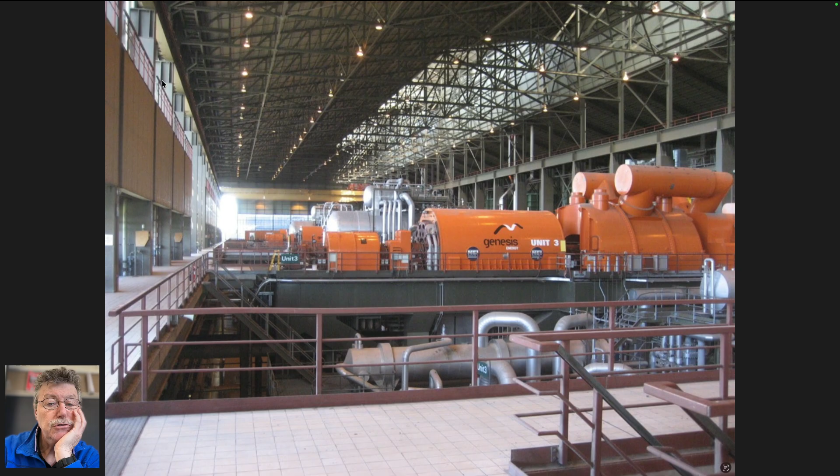So, yeah. Huntly Power Station control room - this is a long time ago. It's a thermal, coal power station. These are coal boilers back here and turbines, and then they added a gas turbine running on natural gas.

Last time we were there in '23, I think they were almost shut down because they had a drought and didn't have any water to run through the turbines.

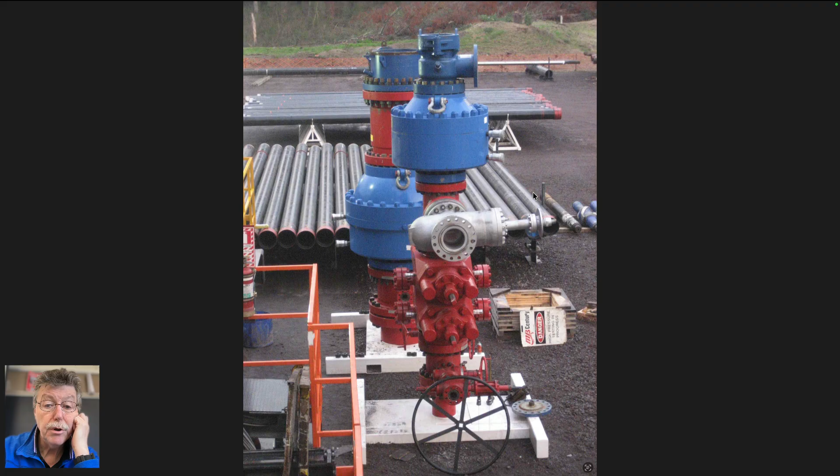Cabooses for accommodation, wind farm, Arapuni Dam, and geothermal plants - Rotokawa, I think. Geothermal generation control room, geothermal drilling rig, blowout preventers. Is it cold up there?

No, it's warmer than State College at that time of year. These were actually taken in May, but in March it would always be warmer - about 60. Isn't New Zealand in the southern hemisphere? Wouldn't that be their fall? Yeah, their fall - it'd be their winter right now, going into fall.

But when we went with the students, it's March, so it's almost 12-hour days, almost the equinox, which must be the 21st of March, right? Yeah, not terrible, not terrible.

Don't fall asleep. Chirpy, less chirpy.

Christchurch after the earthquake - this is 2013. I think the earthquake was 2011. Took a long time. I think this is a waterfall where everyone wanted to go.

What's the strange movie with short people with strange feet? Hobbits? Hobbits, yeah - you went to the Lord of the Rings filming location. This was apparently... we were there for another reason. We went past it. Yeah.

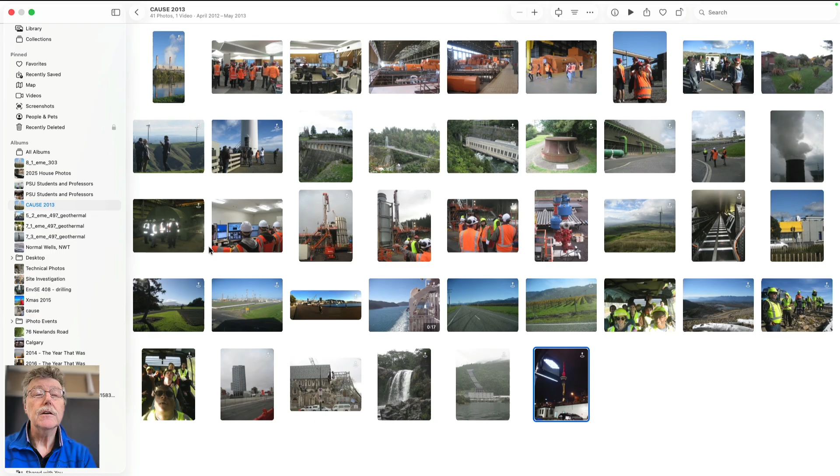Emily, are you alive? You're not paying attention, I know that, but are you alive? I am alive, after your big activity over the weekend. Well done. Thank you. Are the lights back on in DR? Oh, you know about that? I know everything. Some places - they had a big grid failure, 80% down? Yeah, good. Good to hear. Oh, you got to keep up with stuff. Yeah, you are. All right.

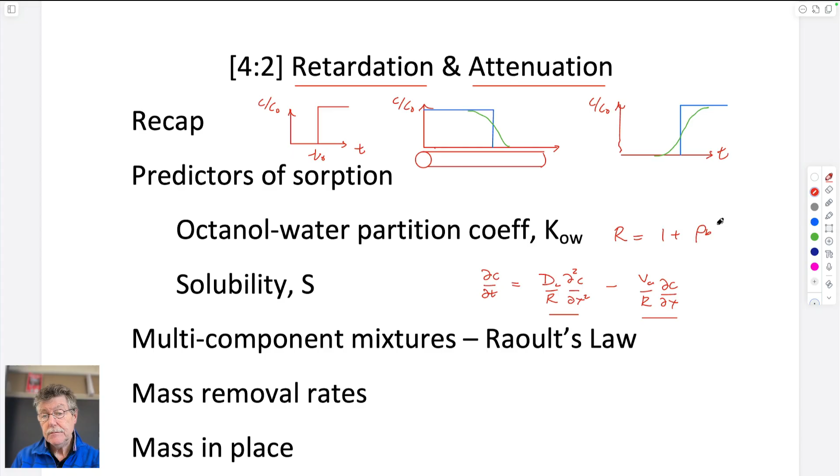Can't remember whether they call it uppercase K or lowercase. And either porosity or volumetric moisture content. If it's fully saturated, it's porosity, which would go into here.

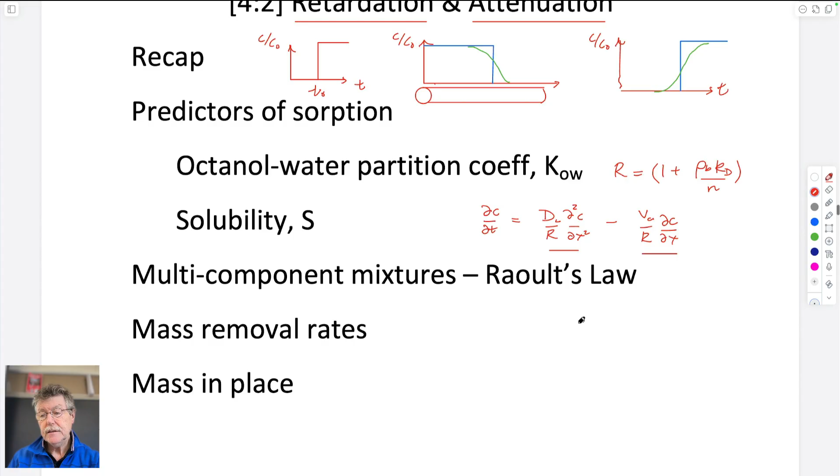And we could define the behavior in terms of this length traveled being equal to velocity times time over retardation. If retardation is equal to 1, then it's just as we had before. And T is equal to length times retardation divided by velocity, advective velocity. This is in the x direction.

And so if retardation is equal to 1, which it is when there's no sorption onto the static grains, then these equations reduce to the ones we had before.

I guess we also made the point that we can define these two important parameters: Peclet number, which is velocity times length over dispersion, and Courant number, which we call pore volume, which was, I can't remember, velocity times time divided by length. Velocity is equal to length over time, times time.

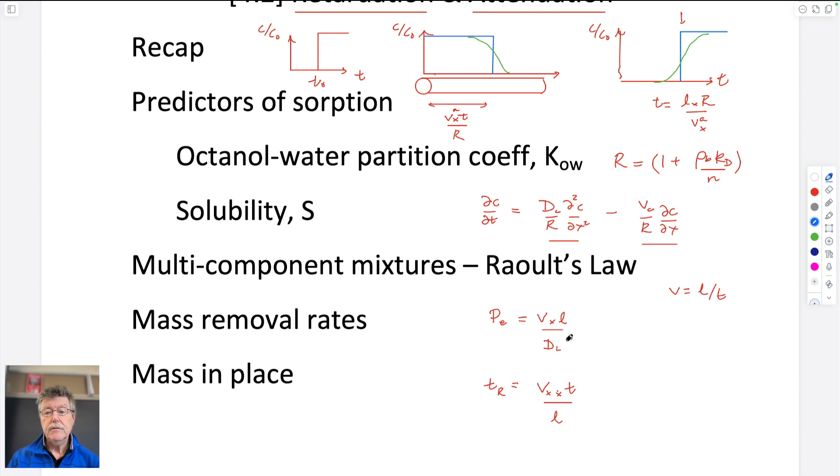And so this is equal to 1. If it's 1 pore volume, then it should arrive, and that gives us this point here. But I suppose we also made the point that we could also divide this velocity. So this velocity means that it would be physically delayed, and so the retarded breakthrough would be here, because r would be greater than 1.

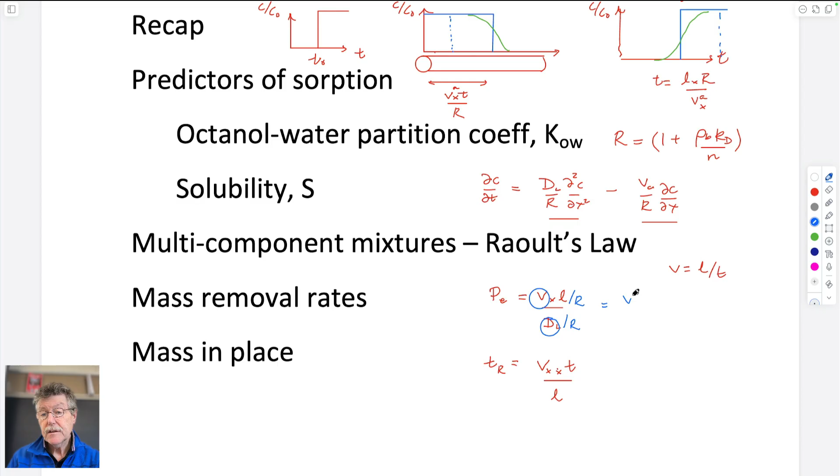And if that was the case, it would also arrive later. And so in terms of these numbers, we could take the velocity, which is operated on by this retardation factor, and the dispersion, which is also operated on by it, and we divide this by retardation, and we divide this by retardation for this, which doesn't change it. Velocity times length over dispersion. But in this case it does, because it's only this top value which is divided through. And so this would be advective velocity times time over length and retardation. So Peclet number doesn't change.

Courant number or pore volumes does change. But with these values, we can use those relationships that we drew the figures for.

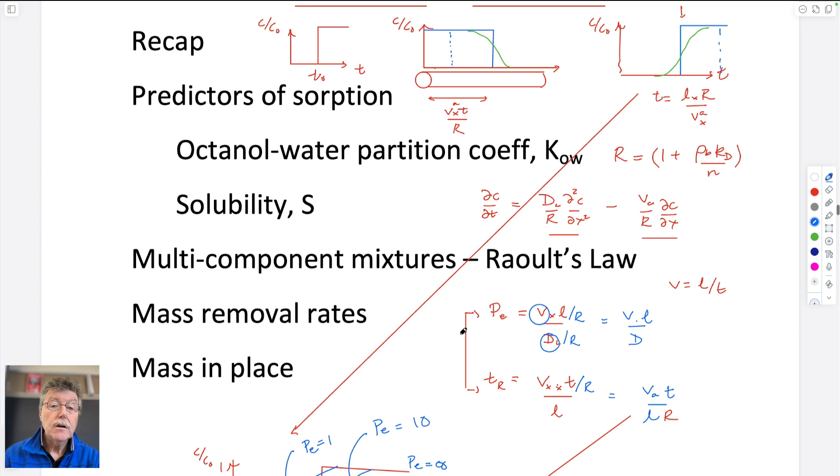So what we did last time was we looked at the controls on the distribution coefficient. We defined this distribution coefficient as equal to the concentration that's sorbed on the solid divided by the concentration in the liquid, in the water, by definition. And so we could always measure this. This was an isotherm, as we called it. And so long as we can get this, we can make some predictions in this behavior.

We didn't come up with any smart ways to do this, except we did use the natural gradient tracer test to realize that if we did that test and the plume went less far downwind as it did for a conservative solute, then we could use the ratios of the velocities as a retardation coefficient. That's physically what it means. It's the velocity of a conservative solute relative to the velocity of a non-conservative solute, and different non-conservative solutes, we chose two, might have different velocities, as we saw. But if we know how far they've traveled in a given time, we know the velocities are in the same ratio, and therefore the retardation coefficients are in the same ratio.

We could use the definition of retardation coefficient, switched around, to get KD. For the Borden site, for carbon tetrachloride and tetrachloroethylene, we got these values of KD. That's useful because we can use that in forward modeling to figure out what the plume would look like 10 years hence, or earlier, if we want to project behavior.

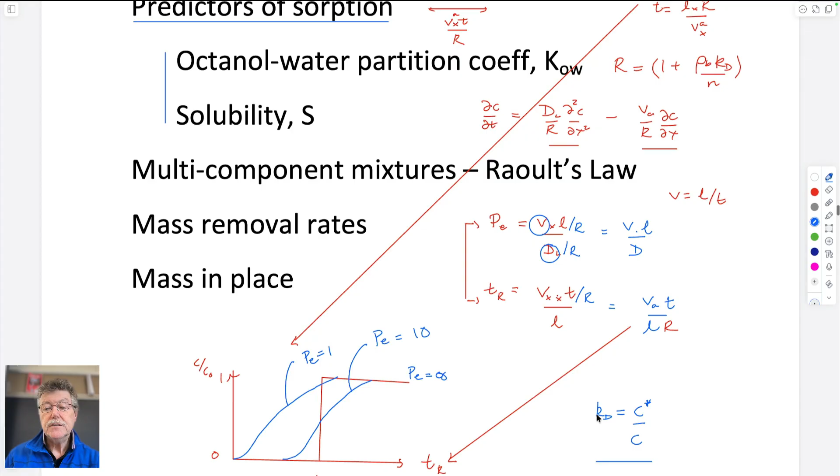What you can use as a predictor of sorption, and therefore of K sub D, are two methods: octanol-water partition coefficients, or solubility of that solvent in water, values you can pick up in a library text, to estimate this distribution coefficient without running the test in the laboratory or measuring retardation factor in the field.

So that's what we'll talk about today: getting KD from octanol-water partition coefficients and solubilities, and what we might want to do if you have multiple species trying to get into the water, as at Smithville, which you've been looking at.

We can also look at how much mass is in situ and how much mass the water can carry, because from Raoult's law, if we have multiple species competing to get into the water, it can't go in at the full concentration of its solubility—it'll be somewhat less. That's really what Raoult's law says.

We'll use that to calculate what the effective solubilities would be, which we'll call S sub E. And if we know the effective solubilities and run water through the system, we should be able to estimate how long it would take to clean up the aquifer with pump and treat.

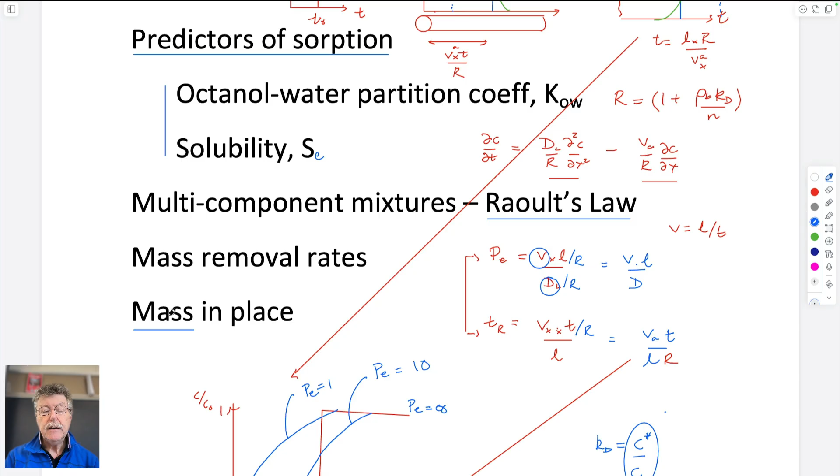We can also make refined estimates of how much solute might be in place, accounting for the amount present dissolved in water, which is just the volume of the aquifer multiplied by the porosity multiplied by the solubility. The volume of the aquifer times the porosity is the total void volume, and if that water is at a particular solubility, the product of those two gives you the mass in place.

But that doesn't give you the full mass in place, because some is sorbed onto the solid substrate, and we have to account for that. So the mass in place will be slightly larger, and it's related to the retardation coefficient. We'll see how to do it.

What's going on? That's not a problem. Reese, are you alive? I am, good. You look tired. A little bit. I know that's not a compliment—people will say 'oh you look tired' and I say that's not a compliment because that's what I always look like. But you don't always look like that. Anyway, well done, by the way.

Back to this. The basic thesis is that organic carbon sorbs these solvents—that's why we use carbon filters to take them out of drinking water. So if most of the sorption in the aquifer is due to the presence of carbon, we can use the sorption capability of carbon and the amount of carbon in the aquifer to figure out what's going on. We can only do that if there's enough carbon to neglect the small amount sorbed onto the quartz grains in the sand aquifer.

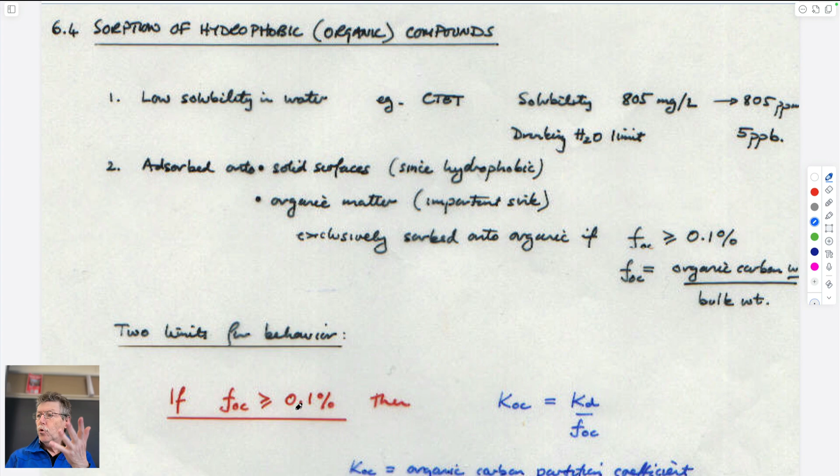The basic idea is that it will sorb onto the solid, but not very much, unless there's carbon present. If there's no carbon in the aquifer, using this approximation for large fraction of organic carbon will give an error, because there won't be any on carbon, but there will be some on the solid, and you won't account for it. So if you have lots of organic carbon in the aquifer, more than 0.1%, we can use KD, rearranged, equal to the fraction of organic carbon as a decimal multiplied by the organic carbon partition coefficient, KOC.

In other words, the propensity of the carbon of the solute to want to sorb onto carbon. We know how much of it is as a portion of the aquifer, and we know its propensity to sorb, and therefore that together gives us the KD value.

If it's less than this percentage, then most of the sorption will be onto the mineral quartz. By using this equation to calculate it, it completely ignores the stuff on the mineral quartz. If there's zero organic carbon, this will give a KD of 0, no sorption, no retardation, and therefore we'll be missing the amount that's on the solid skeleton of the aquifer.

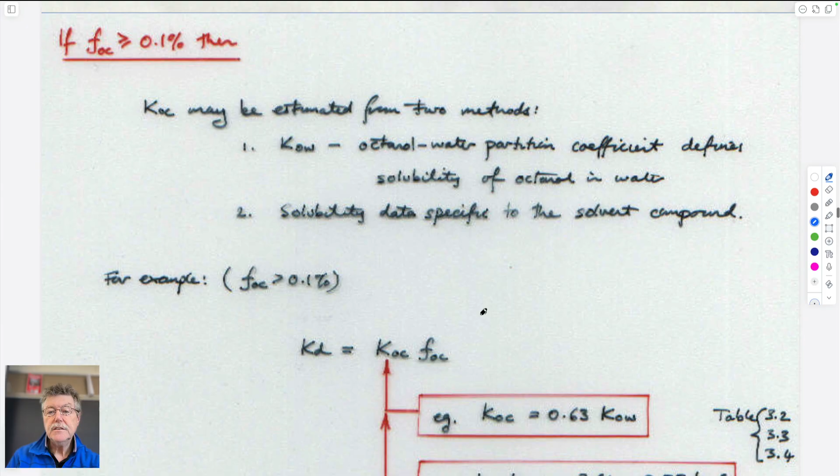So that's what our plan is, and it's relatively straightforward. So the idea is that we can use empirical correlations to link this term here, which we need, the organic carbon partition coefficient.

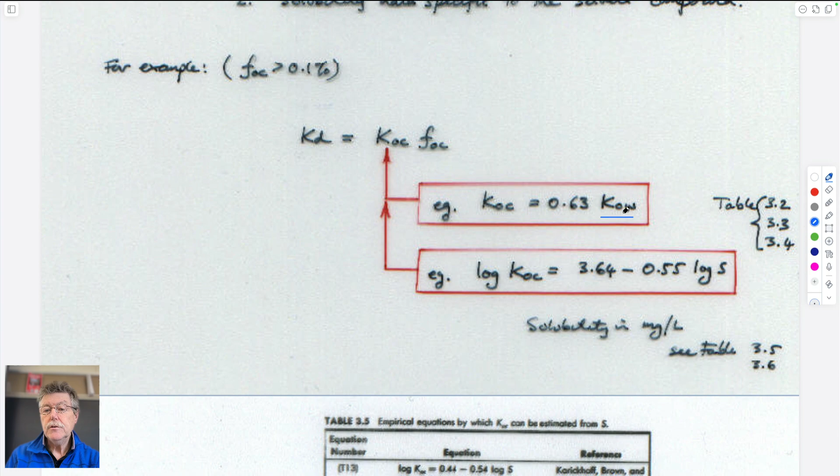We can get this by two possible ways, perhaps more. One is to be able to work out the octanol water partition coefficient, which is a measure of how octanol dissolves in water, its solubility in other words, and that can be used to estimate the organic carbon partition coefficient. Or we could use the solubility of the solute in water to identify this.

So in both cases, we want to figure out what KOC is, the organic carbon partition coefficient. If we have that, we have KD. And if we know how much organic carbon there is, we have this. And if we have that, we know the retardation is equal to 1 plus bulk density over porosity times KD.

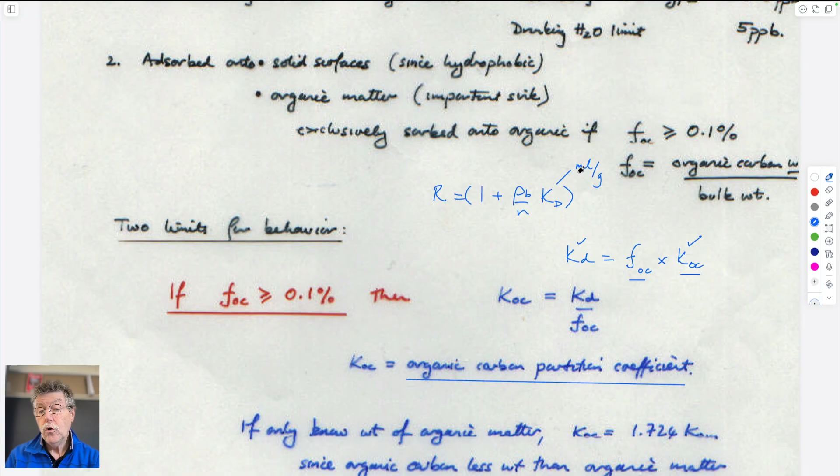And this is in milliliters per gram, or liters per kilogram, typically.

So it's a recipe. These are horrible slides that come out of Fetter. I know none of you bought Fetter, which is fine. The idea is that we can use some empirical expressions which define this term in terms of some coefficients, and it's just a recipe for its manipulation.

So you take whatever the substance is, you find out what its solubility is, you plug it into this expression, you find out what log KOC is, you do 10 to the exponent to get KOC, and once you have KOC, you have KD.

That's it. And so it's a recipe. I don't know whether you can see that or not, but if you want to do that, there's a whole series of these empirical relationships.

They're for different compounds. We're going to look here at ethylbenzene in this particular case for this expression here, which apparently it can be applied to. It looks like this, and it needs a value of the solubility of ethylbenzene for this.

The solubility of ethylbenzene is this number here, 140 milligrams per liter. So this is parts per million, I guess, right? A gram is a thousandth of a liter, a milligram is a millionth of a liter, in terms of density. So this is parts per million.

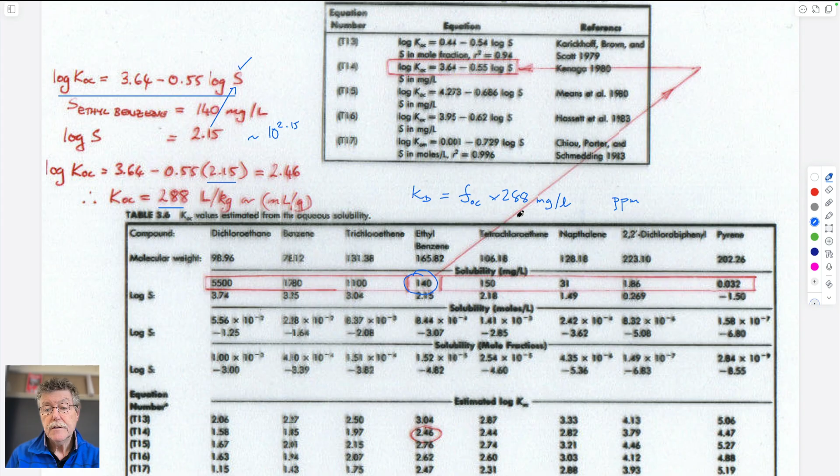So if KOC is this, then the distribution coefficient, KD, is going to be equal to the fraction of organic carbon multiplied by 288 milligrams per liter. You have to use these units, that's not dimensionless, so this would be parts per million, ppm, for this term here anyway. Okay, so that's one way to do it.

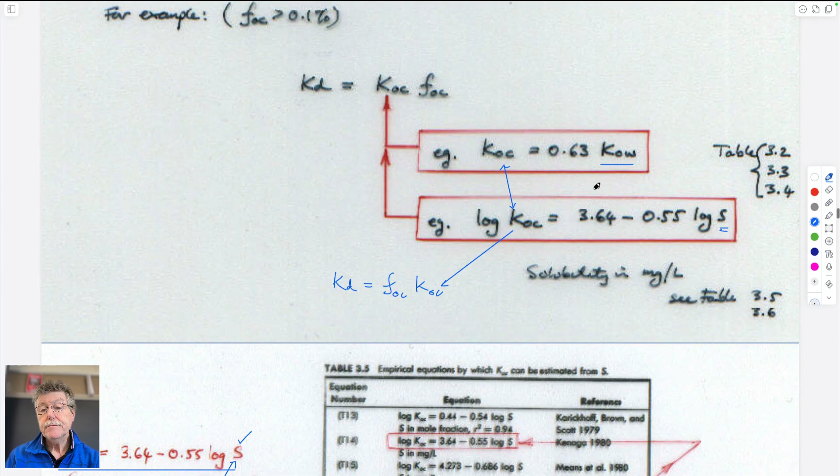The other way to do it is to use the octanol water partition coefficient, and that could be used, got from a textbook.

This here is this number here. If we do it for benzene, if you can see it, it's 2.13, the log octanol water partition coefficient. I should get a better version of this slide. 10 to the exponent again is 10 to the power 2.13, which is 135. Substitute it into this again, in milligrams per liter rather.

Substitute it into here, so 0.63 times 135 is 84.98, and that's what this number should be. The table's wrong, so it's just a matter of figuring out exactly what these numbers are, either from using the solubility or by using the defined value of the octanol water coefficient available from many textbooks. Once you have that, you can calculate what KD would be.

We didn't dwell on this, we didn't do this last Thursday, but you could calculate for Borden. Borden's a very clean aquifer. Maybe it has 0.02%, so that's 0.0002, right, as a percentage.

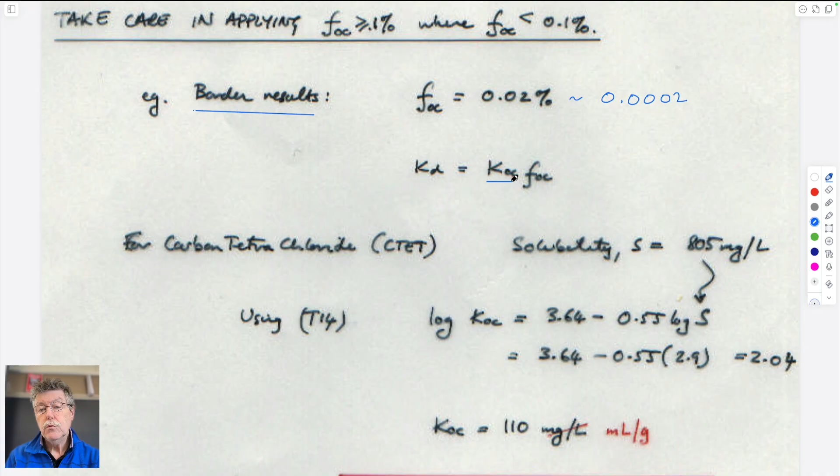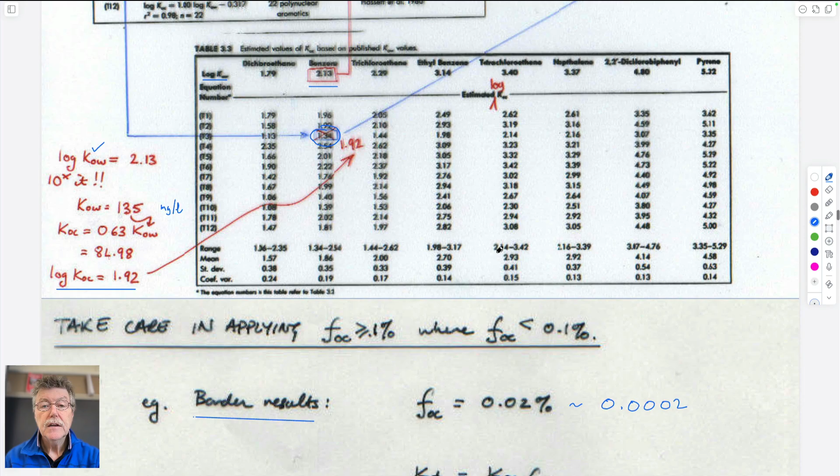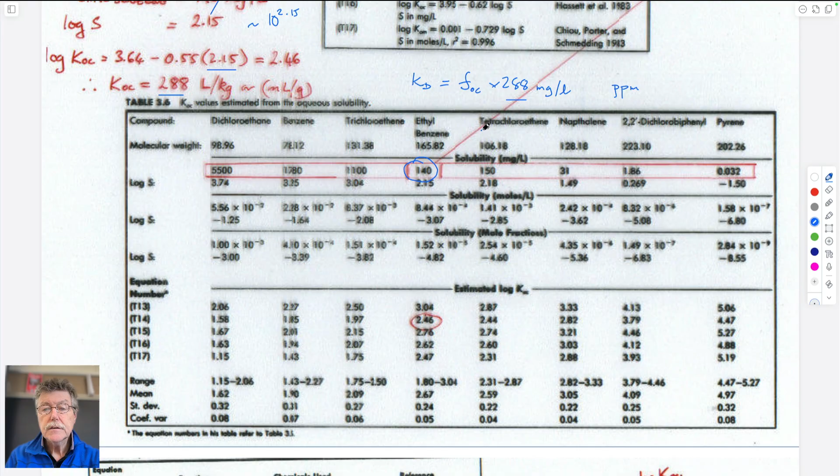So we shouldn't use it, but if we try, we can calculate what the organic carbon partition coefficient is. We can do it from solubility. I don't know whether carbon tet was one of the compounds here. I thought I got it from this table, but perhaps not. Tetrachlor, I think. Is this it, 106.18? Oh no, that's solubility, not OW.

Is that it here? Could be 150. Let's see if it is 150. No, it's 805. Don't know where it came from, take it on trust anyway. So if the solubility is 805 milligrams per liter, you can use the same expression we had before. Log of 805 is going to be somewhere between 100 and 1,000, so 10 to the 2 and 10 to the 3. It's closer to 1,000, so it's closer to 10 to the 3.

2.9. In other words, this value of 805 is actually equal to 10 to the power 2.9. Substitute in here, do the math, ends up being 2.04 in terms of log KOC. If you take 10 to the x of this, 10 to the 2.04 is just a bit bigger than 100, turns out to be 110. So the organic carbon partition coefficient is this, in milliliters per gram.

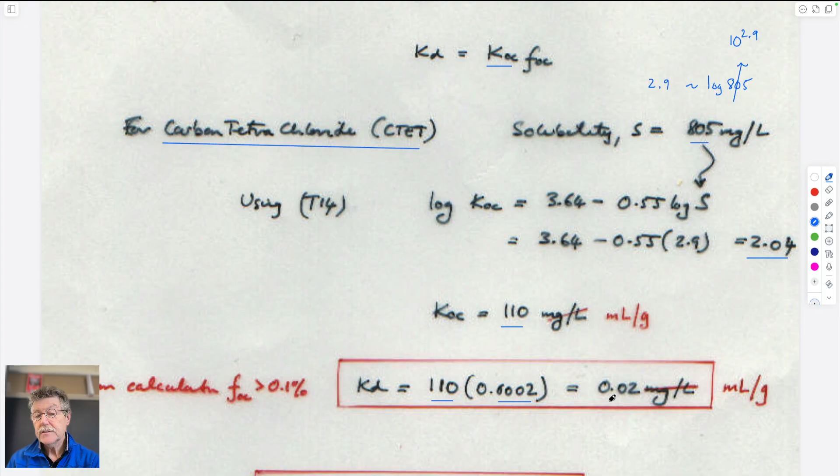And if we multiply this value by the fraction of organic carbon, 0.02%, you end up with 0.02 milliliters per gram. So that's the value of KD.

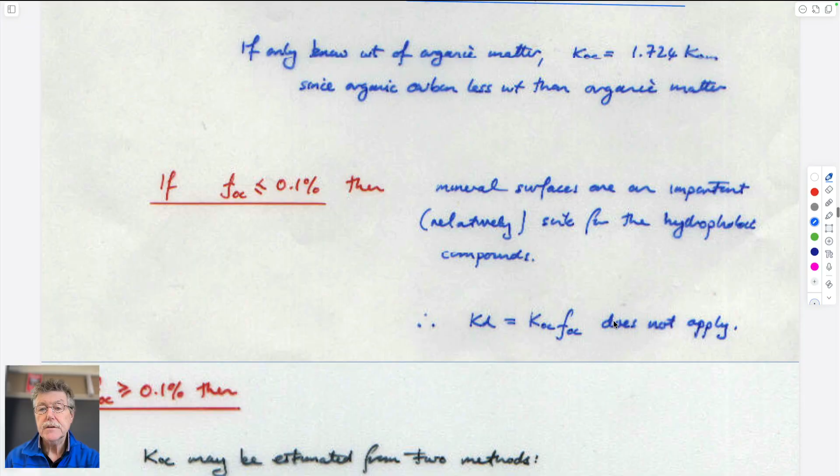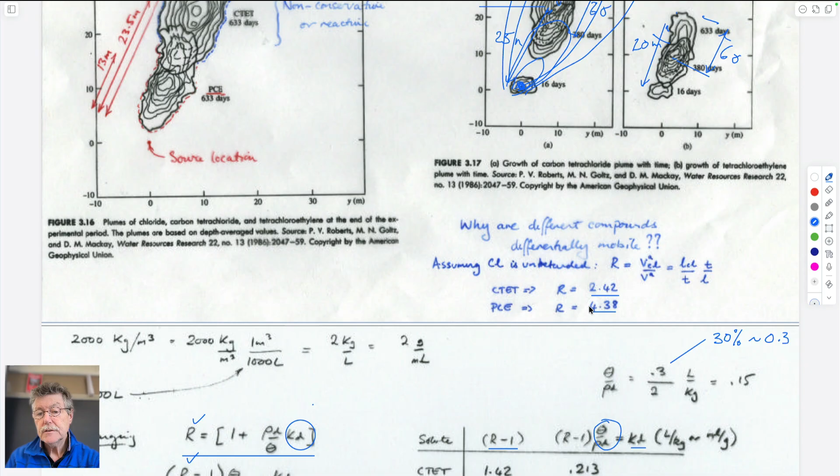So the option is that now, since we did Borden, we didn't spend much time on it, for carbon tetrachloride, this is this. We realized that the plume had only gone a fraction of the distance. At 2 years, it's gone 57 meters for the conservative solute and something like 25 meters for the non-conservative. I guess it wasn't quite 25, it was less than 25, because we have a number bigger than 2, which is this. So this is our retardation factor.

So if we go back and from a known value of retardation factor, figure out what this is, if we know what the bulk density of the aquifer is - kilograms per meter cubed, 2,000 kilograms per meter cubed, or 2 kilograms per liter - and porosity of 30% as a decimal, it turns out that the value of K sub D in milliliters per gram should be about 0.213 milliliters per gram. And that is from the real site, where we're not making any assumptions about the amount of organic carbon.

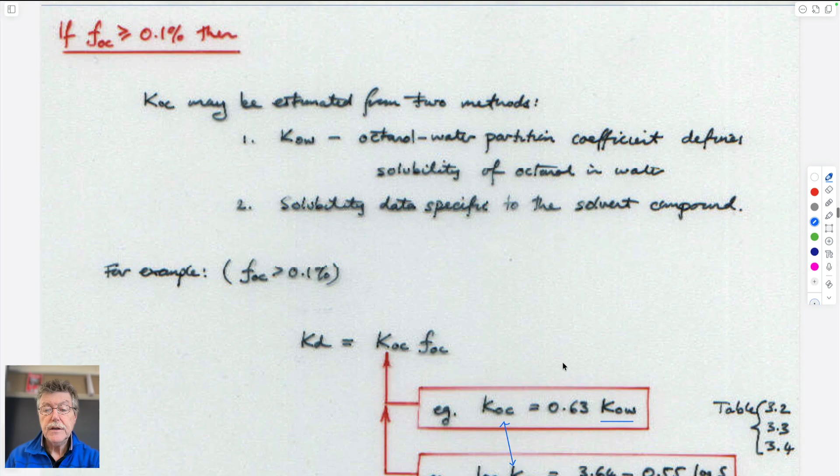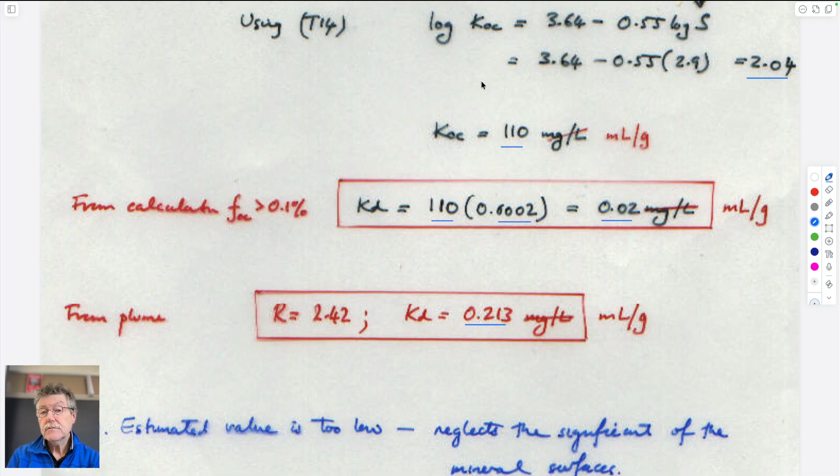So if we compare this 0.213 versus the value we got from the other system, from doing it the other way, this is much, much higher than our calculation using this relationship. And the reason for that, as we stated earlier, is we're assuming that all the sorption is on organic carbon, but there's almost no organic carbon in the system. So we're completely missing the amount.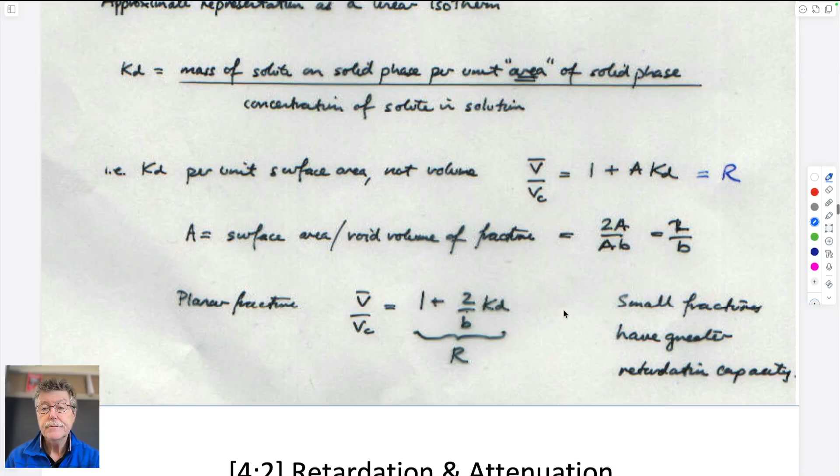Okay, so that's that. We saw that for Borden, the retardation coefficients were less than 5, was it, and greater than 2 - they're within this range. If we looked at the values for the natural gradient tracer test, I don't recall right now. Yeah, so 4.38 and 2.5-ish, so they're in that range.

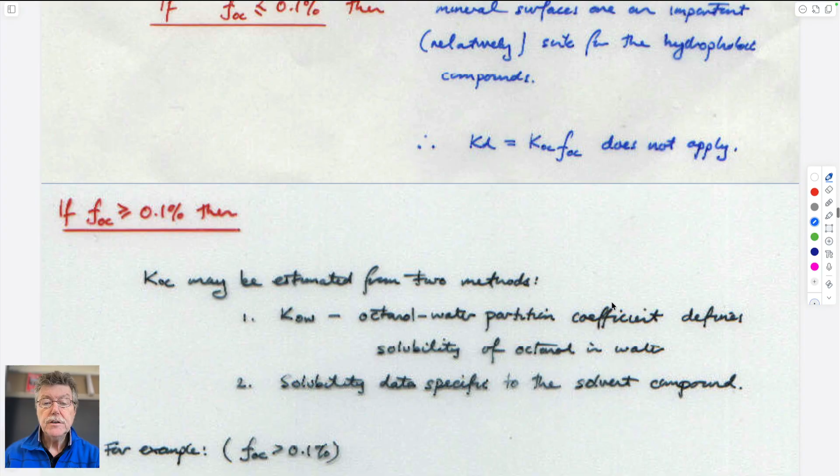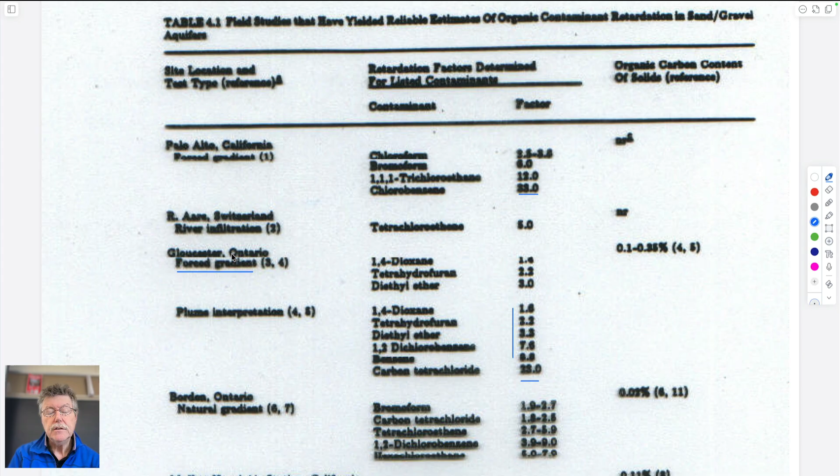Don't know where this one is. This is Borden, natural gradient experiment. Two of the ones we looked at were for carbon tet and tetrachloroethylene, 1.9 to 2.5, 2.7 to 5.9. Our estimates were 2.5 and 4.3, I think, right?

So we're in that ballpark. Moffett Field Naval Air Station, don't know what that is. Otis Air Force Base is a contaminated site on Cape Cod, and all these things. But I guess you get some appreciation for these magnitudes. That's the only reason I turn to this.

They're all greater than 1. Sometimes they're in the low digits, 1, 2, 3. Sometimes they go up to 10, and sometimes they can be very high. So we'll come back to these different sites at the end of our class today and see how much was spilt or disposed of at each of these sites, how big the plume can be. And of course, that's the big deal, right? If you spill one barrel of solvent at one of these sites, once it's spread out into a plume, you have to harvest this huge volume of fluid in the aquifer to be able to recover it. And so that's what makes the huge, huge expense.

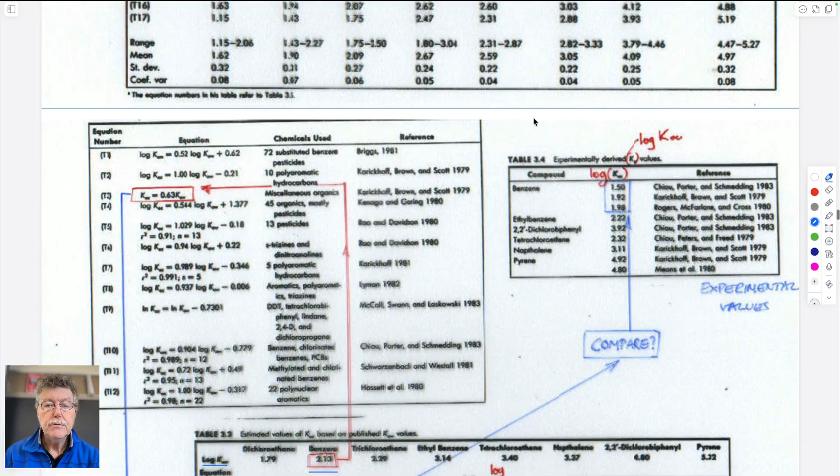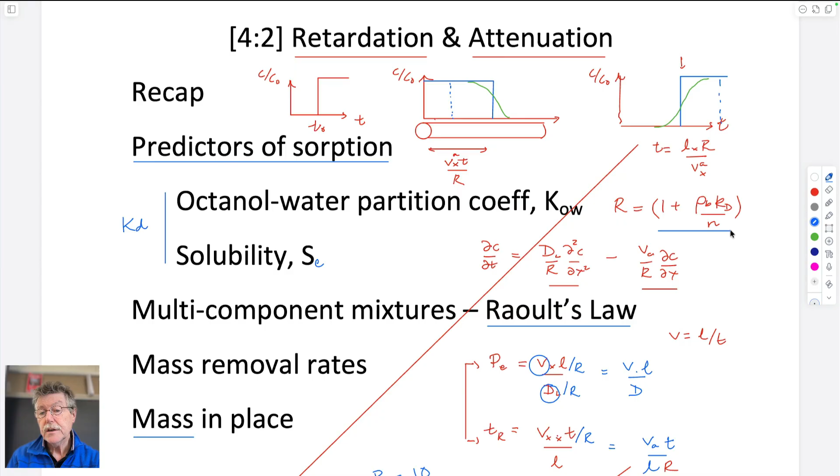So we talked about what the magnitudes would be for K sub D, distribution coefficients, to be able to use in this relationship, so we can estimate what retardation would be. So far we've done it only for a single compound, but now what we might do is look at what the case would be for Smithville, which is also in Ontario, if we have multiple species competing at the same time to be dissolved in water.

And so for that, we use Raoult's law. I'm sure you've seen it in the past. The effective solubility, when you have multiple solutes, is equal to the solubility of that solute on its own in water, the free pure phase solubility, multiplied by a fraction, and the fraction is defined in terms of mole fraction. That is because individual molecules are combining with each other one-on-one, and so it should be mole fraction that is the index, not weight fraction or volume fraction, but mole fraction.

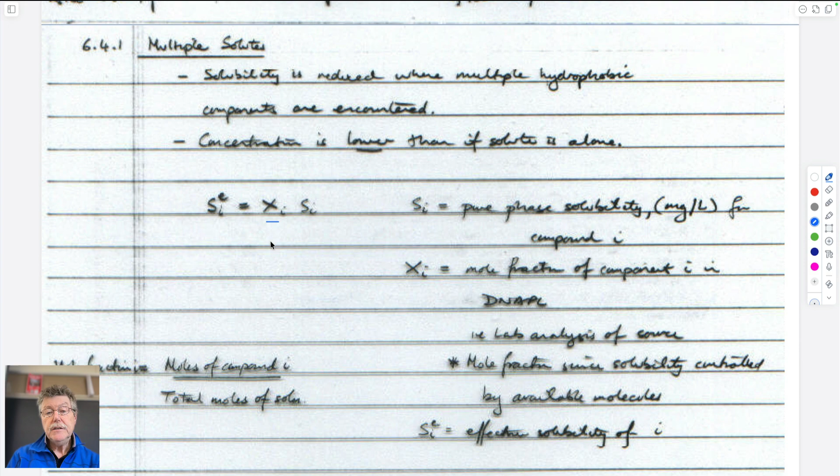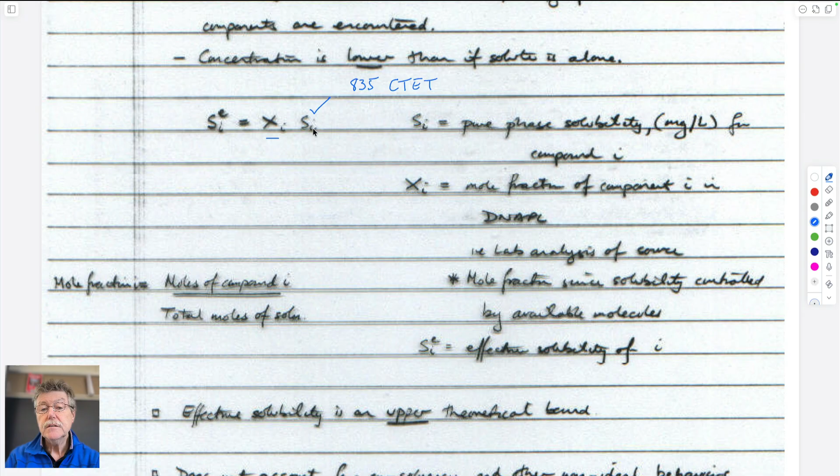And so it's a pretty straightforward number to calculate, because we know what these free phase solubilities are. It was 835 for CTET, carbon tetrachloride, etc. I think for TCE it's 1100, a number I often used, but we know what this number is. But if we know it's present with other solvents, then we have to reduce the solubility accordingly because they're competing to dissolve. So this is just the calculation for Smithville.

So TCE, TCB, and PCBs, plus mineral oils. These percentages you've already seen, they're in weight percentages. So if we know what the molecular weights are, then we can calculate for 100 grams of cocktail exactly what the proportions of these components would be. So the formula weight for TCE is 131 grams per mole, I guess.

And so if we take the 2 weight percent and divide by the molecular weight, that means we have this number of moles in the cocktail, 0.0152. If we take the 10 weight percent of TCB and know its molecular weight, then the ratio of those two numbers, 10 over 181, gives us 0.055. That's the number of moles we have of that component. We do it for PCB, and for mineral oils with the molecular weight. I don't know if this is right or not. And then these are the total number of moles we have in the system.

So if we have 0.0152 moles of TCE in a total of 0.677, then the ratio of those two is just the mole fraction, and so we can calculate the mole fraction. So instead of being 2% by weight, it's 2.2% by mole fraction. Instead of being 10% by weight, it's 8.12. So it's the appropriate scale. They're not very different from each other. Perhaps you could get away with using these given all the uncertainties you might have in the representation, but these are the actual magnitudes.

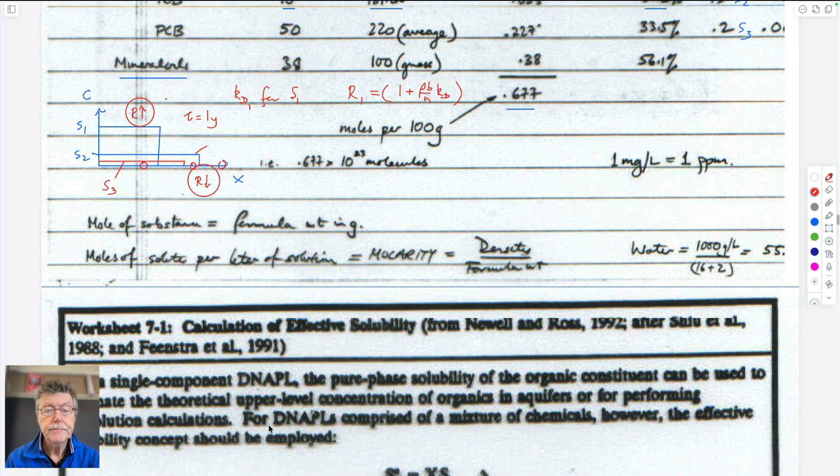All right, and finally, now if we know what concentrations they will dissolve in aqueous solution at, this would be the maximum concentration they will dissolve at. Then if we have water flowing through an aquifer, taking out the free phase components, we could calculate how long it would take to clean up the aquifer, just very straightforwardly. So there are some simple models that we might be able to use.

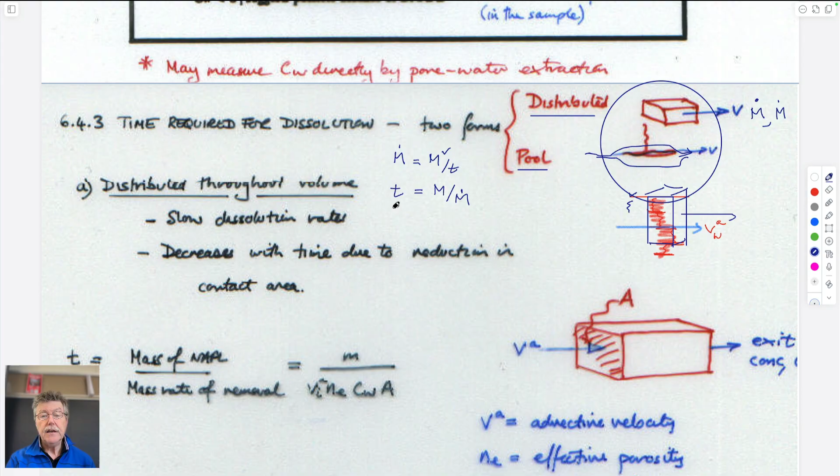So these are just two different models. The first one is really kind of cleaning up the smeared chimney, if you like. This is just what I said already: the total mass within the system divided by the mass rate of removal gives us the time to clean it up.

The mass rate of removal we could get from the advective velocity times the porosity. Since we know that advective velocity is equal to the Darcy velocity divided by porosity, this product of advective velocity and porosity is just the Darcy velocity. So the Darcy velocity multiplied by the cross-sectional flow area gives us the volumetric flow rate. Cross-sectional area of flow is this upstream or downstream area.

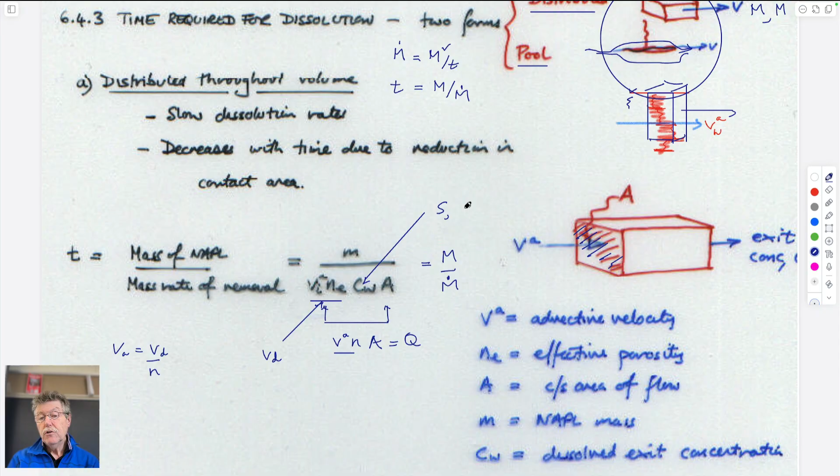And so if you know what this solubility concentration is, then you can do that. This could be the solubility, or more likely the effective solubility of species i—in other words, these are the effective solubilities. You're better off using these because they represent if you have multiple solutes. So this would be the effective solubility, and it could also be these numbers multiplied by some factor, as we'll talk about a bit later, because it might not be very effective at picking this up.

You can imagine that if you flowed water through this very quickly, it wouldn't have enough residence time in this volume to dissolve all the material up to its full loading into the water. If it's almost stagnant in here, it would reach that maximum concentration, so there's some number between 0 and infinity at which you would take up a full loading, which would be this magnitude. If it flows faster than that, it will only have a portion of it. You could do a calculation for this.

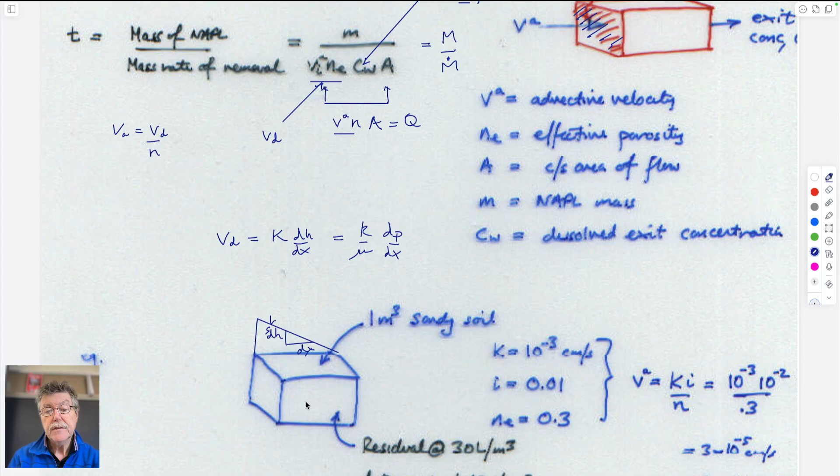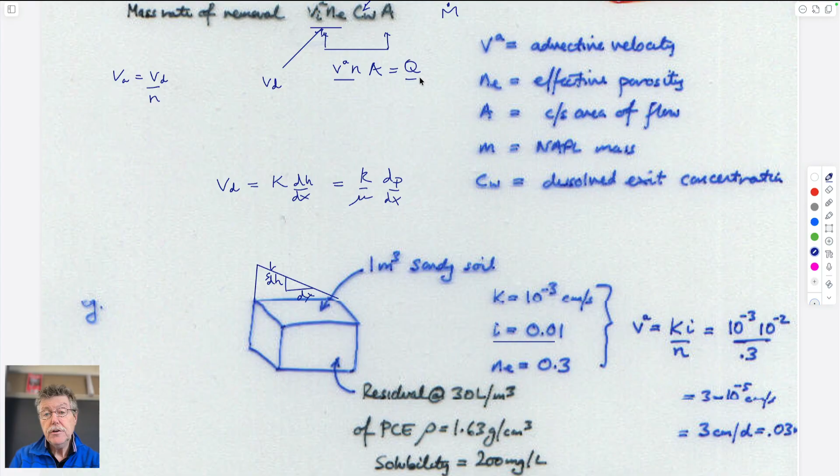So if you know that the Darcy velocity would be equal to hydraulic conductivity times dH/dx—I guess we also know that this is equal to permeability over viscosity of water times dP/dx—and if you know from the slope of the water table above it, for instance, that this dx and dH are the same, in other words if you know the hydraulic gradient, dH/dx, just a number, say 1 in 100, and hydraulic conductivity, a reasonable number for porosity, you can get an advective velocity or a Darcy velocity. And if you know what that Darcy velocity is, you get Q. And if you know what the effective solubility is, you can get this term here, and you can use those to make a calculation.

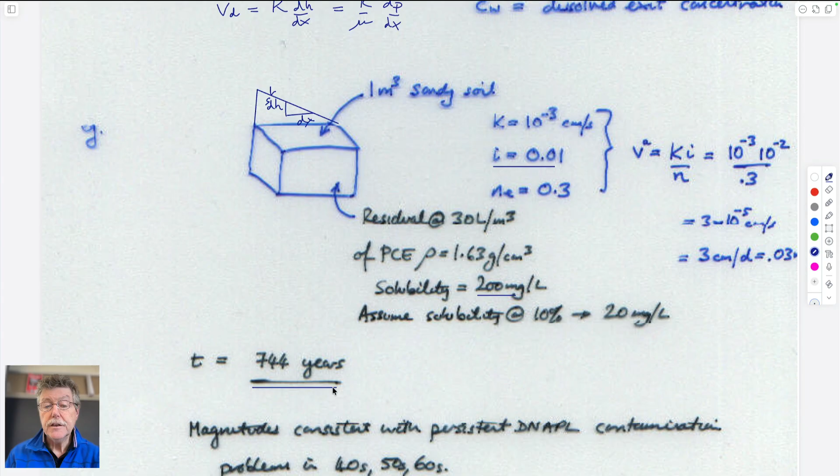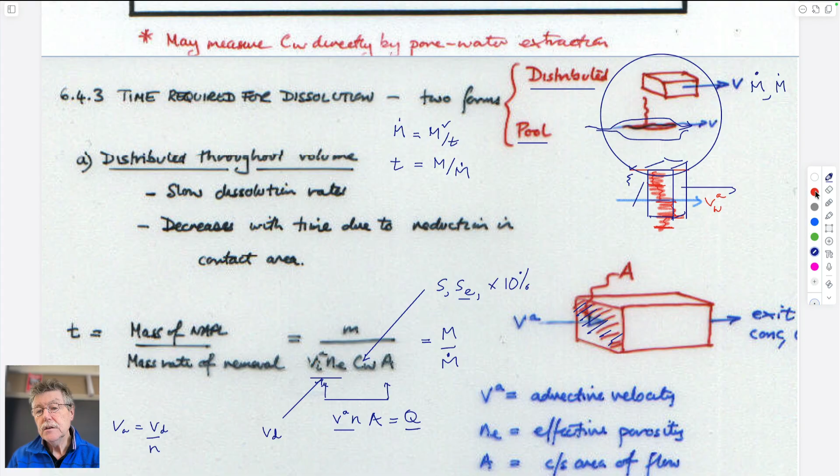So that's distributed flow within a volume in the chimney. The other model would be a puddle sitting down in different locations within the chimney, or at the base of the capillary barrier where you have flow over the top. This has limited contact because it only touches on the top and the bottom. So you could imagine that this would, by Fickian diffusion, diffuse into the water flowing around it, and then be carried with the bulk motion of the water as it goes downstream.

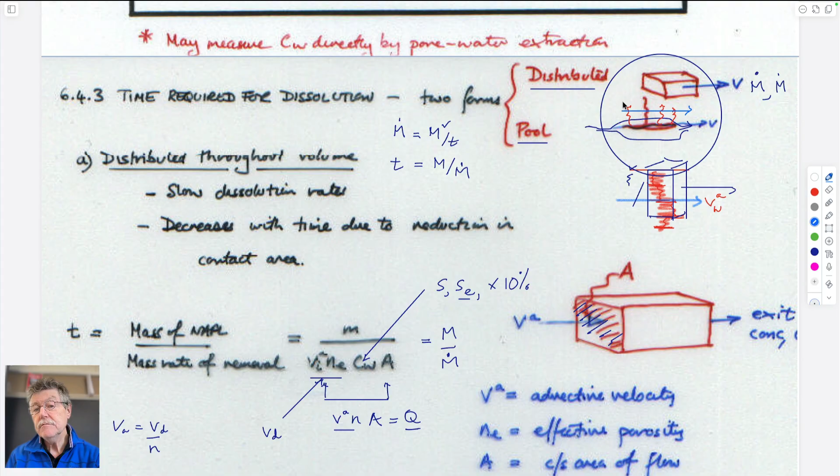That's what this second solution is. Water flows past here, creating hydrodynamic dispersion and diffusion to let the free product dissolve into the water and move by the concentration gradient. It moves by the concentration gradient, then gets advected downstream by the water flowing past it. So all this is a solution that accounts for that—I guess it looks at this kind of... let me do it in red.

Did you know on Notability? Oh, you're not the Notability fiend, are you? It's your other colleague who isn't here today.

Oh, Notability, yes, Stephanie. I found a trick to change colors without using the keyboard. You can tell her that I've mastered Notability. Just trying to impress you with my IT skills. Not with that one.

So this is the puddle that sits at the bottom of, or on top of, the capillary barrier. The idea is that we can take a column, which is a unit area within this system, and look at diffusion of that into the water that's flowing past it.

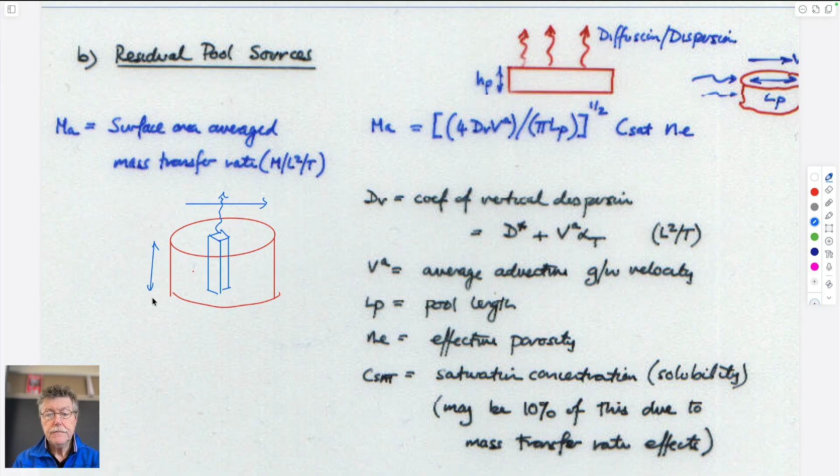This is by dispersion, escaping like this. This is by advective transport around it. I call it two different things here: pool, this is the length of the pool, uppercase L, and this is the height of the pool, HP. The length controls the dispersion or diffusion into the water traveling around it, and this is the advective velocity of the water.

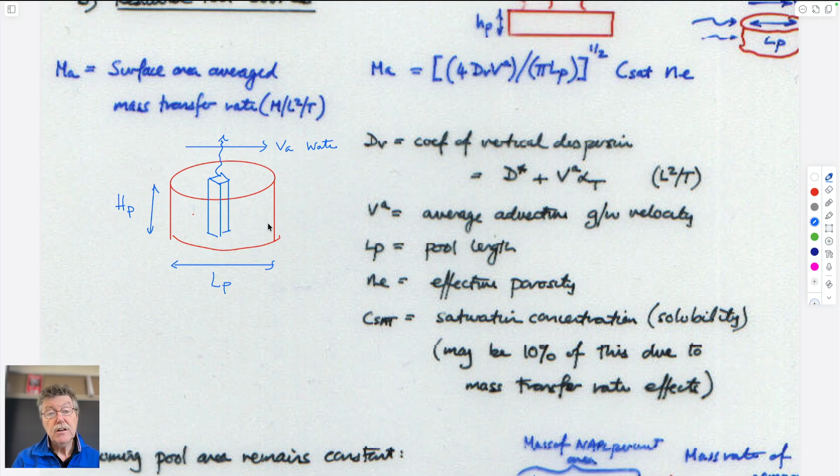This is dispersion of the solute, and it's just a closed form solution. The length is the length across the puddle, the height is the height of the puddle. This is the surface average mass transfer rate—in other words, the mass transfer that comes out both top and bottom per unit area, meter by meter, into the water that flows past it.

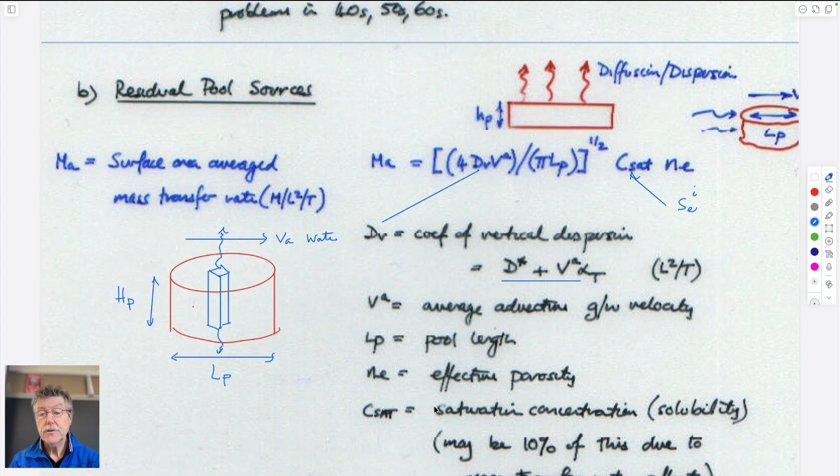CSAT would be the effective solubility of species I, whatever that is, and NE would be the porosity of the system. So you have all those here. If you have the mass rate of removal—mass per meter squared per unit time—and you know how much mass is present within this puddle, you're able to calculate the time it would take to deplete it.

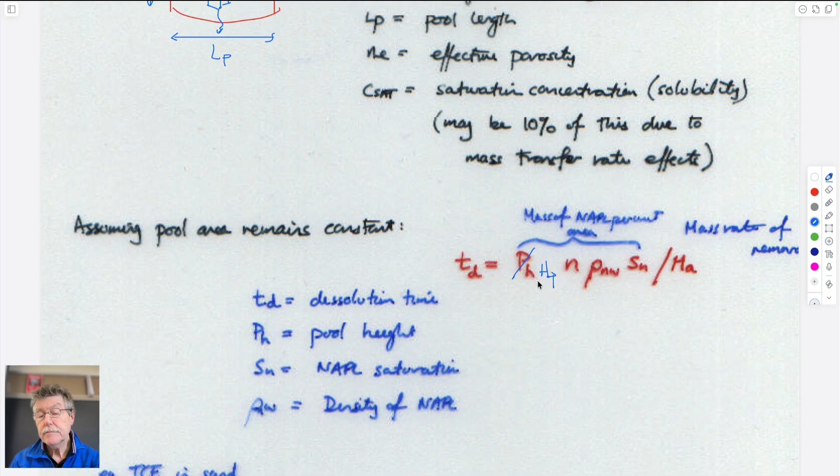So this is the mass within the puddle. What would this be? This would be the mass per unit area. So this is the mass of that per unit area, this would be the height of the puddle. Porosity times saturation would be the mass in the pore space.

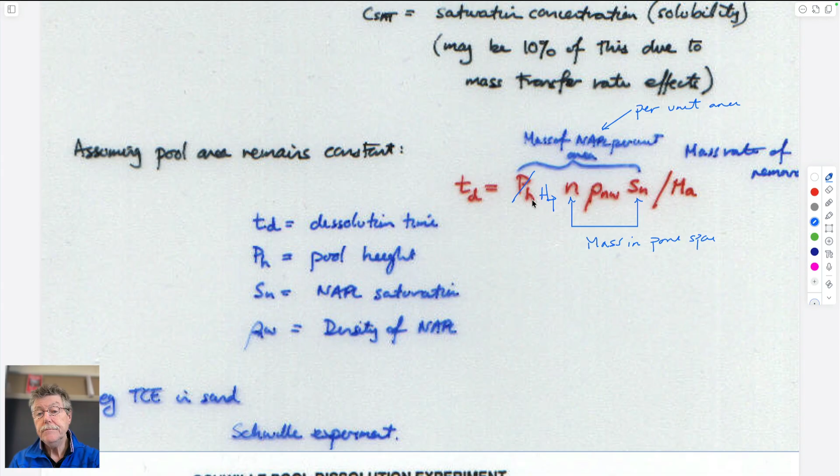Multiplied by the height of the column, so this would also be HP. The mass per unit volume multiplied by the height gives you the mass per unit area—sorry, the volume of that, so that'll give the volume per unit area. Multiply volume by density, you have mass. And if you divide that by the mass rate of removal, you have the time taken to deplete it.

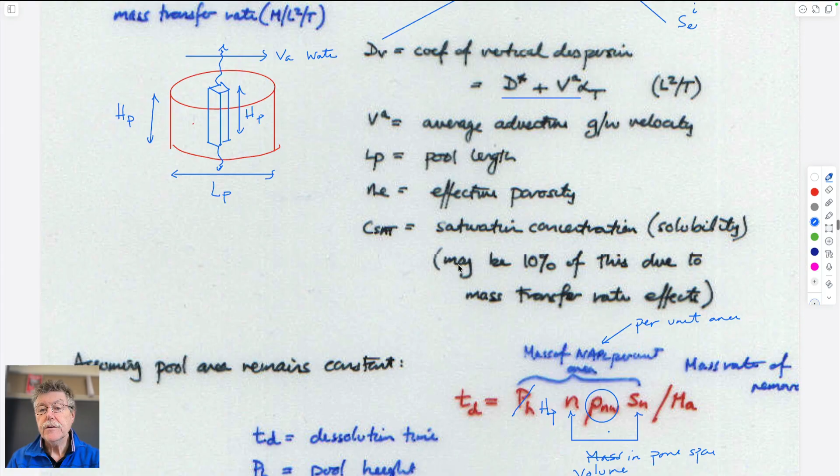So all this is to make the point that you could imagine this occurring in a couple of different geometries: one where you have it flowing through the smear zone, picking it up, the magnitude of the effective solubility being conditioned by the residence time. Likewise, this one is also conditioned by the residence time, in whether it picks up enough if it's flowing slowly enough across the top to pick up the bulk of this diffusing mass into the system.

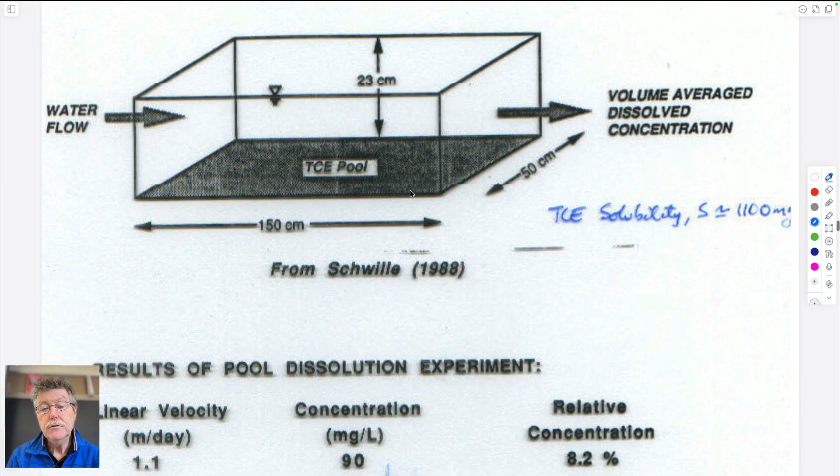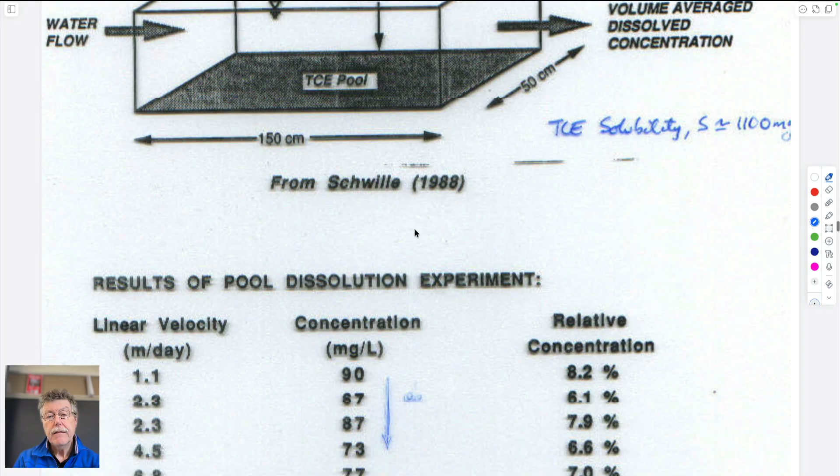The reason for looking at the residence time as it goes across the top is that if you do an experiment where you take an aquarium, put a puddle of TCE on the bottom, and fill the aquarium with sand, flowing from one side to the other, then as a result of the solubility of TCE in water, if you flow it at different velocities—say 1 meter a day—these are advective velocities. This would give a residence time of 1.5 days, traveling 1 meter in a day. Or, no, 0.15 days.

No, that's right. 150 centimeters is 1.5 meters, right? 1.5 days, 2.3 days, etc.

So if the velocity is larger and the residence time is shorter, you'd expect the relative concentrations to decrease. And so if it spends less time in contact with the material it's flowing past, then you'd expect the concentration to be reduced, and these concentrations are 10% of the magnitudes.

There's no magic number in 10%, but it's just that at these particular velocities, it spends insufficient time in contact with this pool, both because it has to diffuse into it and because the residence time is very short, so that it only picks up a fraction of the concentration.

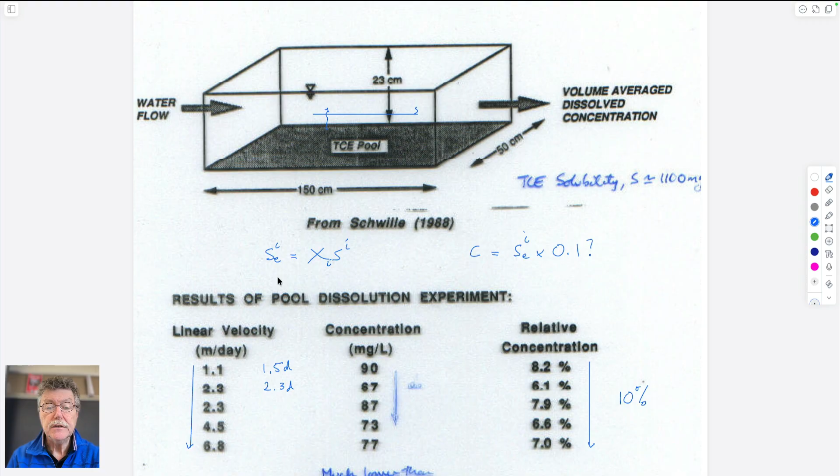It seems very hokey, doesn't it, to be able to get the effect for this residence time distribution. So all things you might want to be aware of when estimating these things. So 10% is not a bad number.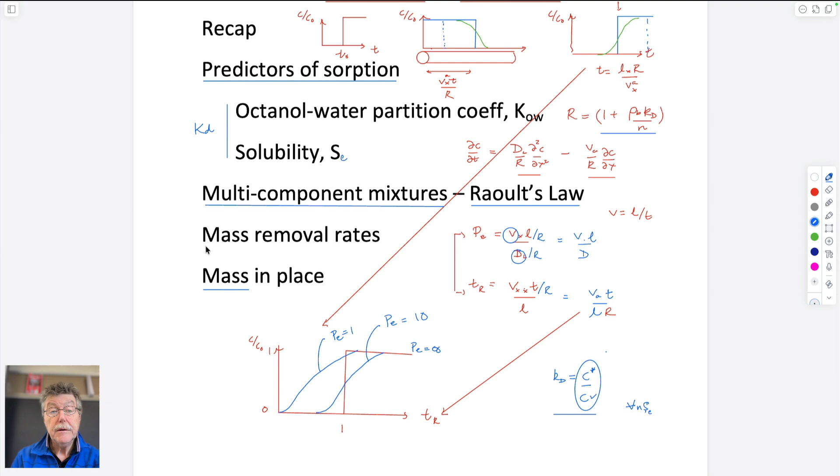So finally, the final thing we wanted to calculate was how much mass is present in place. And so we talked about mass removal rates, that's what we just discussed. So how do we calculate the mass in place?

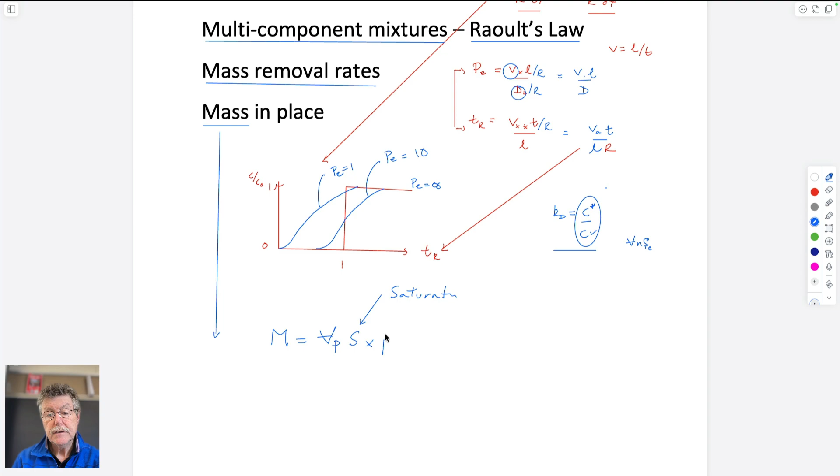So we suggested before, and I guess in these last calculations, that the mass was going to be equal to the volume of the pore space multiplied by the saturation - this is saturation, not solubility - times the density. And so this would be equal to the volume of the reservoir times the porosity, which would be this term.

This would be the saturation, how much of the pore space is filled with that component, and what is its density. And so that is a reasonable estimate of the total mass that's available, but what it doesn't include is the amount that is attached to the solid.

So we've said that a distribution coefficient defines the ratio of how much is present on the solid versus how much is present in the water. And the way that we would do that is by this little experiment where we take a porous medium.

We dump in a component which has a certain concentration in the liquid and a certain concentration that sorbs onto the solid. We do it with a certain concentration in the liquid and see how much attaches to the solid. We do it again with a higher concentration in the liquid and see how much attaches to the solid. It gives us 2 data points.

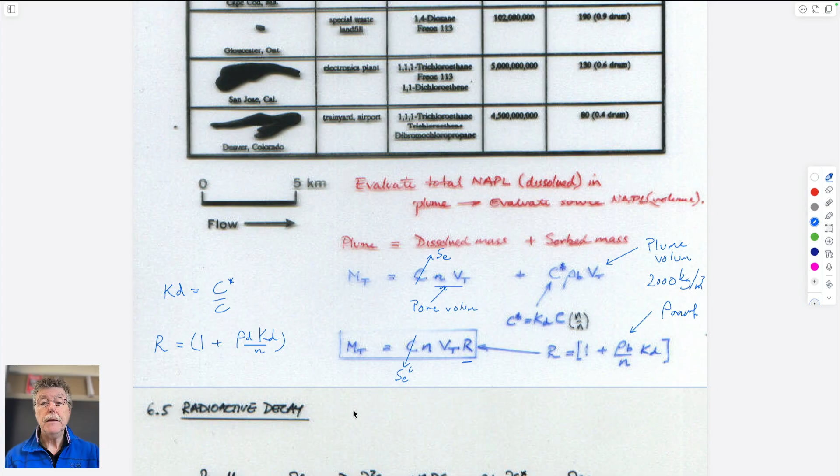This is the bulk density of the aquifer - 2,000 kilograms per cubic meter, which goes in here. And I guess you don't need it here because the solubility takes care of the mass that turns up here. Okay, that's it I think. Not going to talk about this, don't need to talk about that.

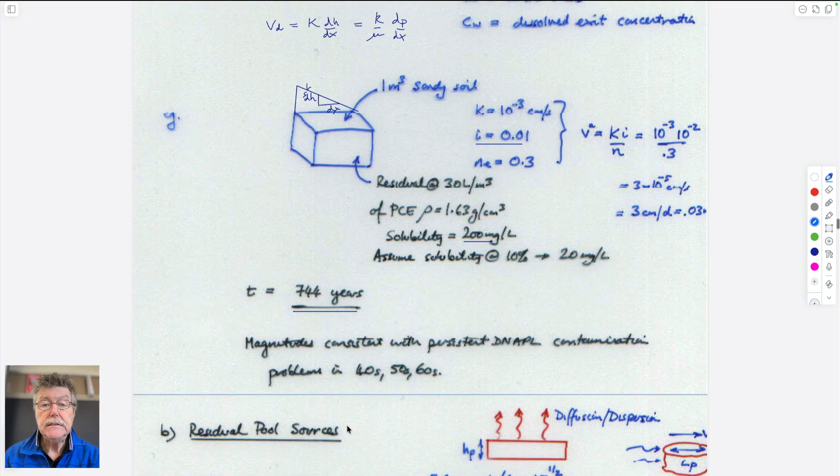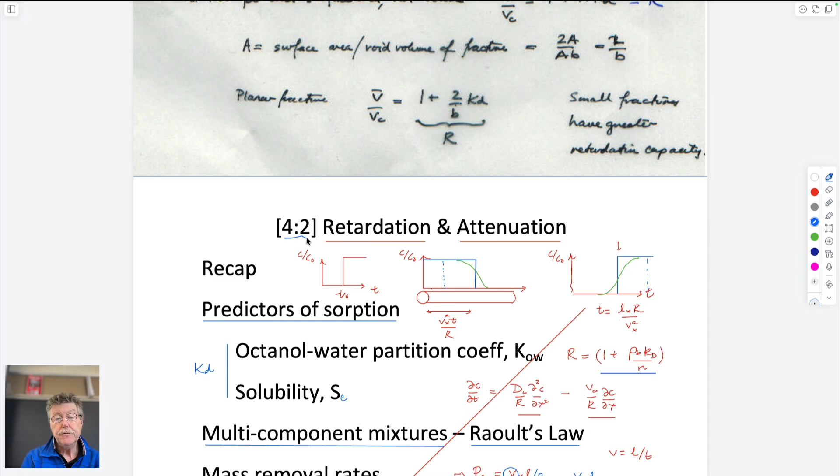That's it. So now we know everything dealing with the dissolved components in the groundwater zone. 4.1 was dealing with the mechanisms by which sorption occurs. 4.2 is talking about how to estimate it from useful parameters such as octanol water partition coefficient and solubility, how to accommodate competing solubilities from compounds in water, and to calculate back of the envelope rates of removal from closed form solutions, and also to calculate, if we want to figure out how much is in place, we can calculate that as well.

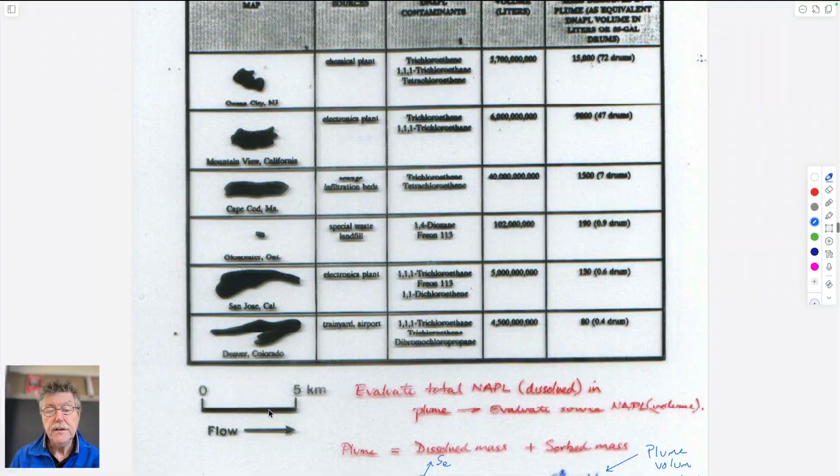And I guess the parting shot is to realize the role of entropy in all this. So entropy, I guess, means that disorder always increases. So those contaminated waste sites that we looked at previously are drawn out here in terms of the plumes.

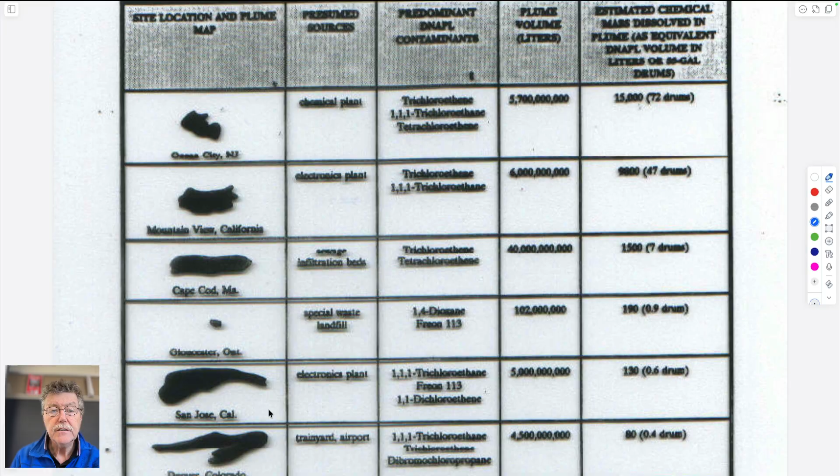These are plan views of the plumes that developed at each of these sites. Cape Cod was Otis Air Force Base. Gloucester was a landfill in Ontario. This was solvents in California. This is probably the Denver Arsenal near Denver.

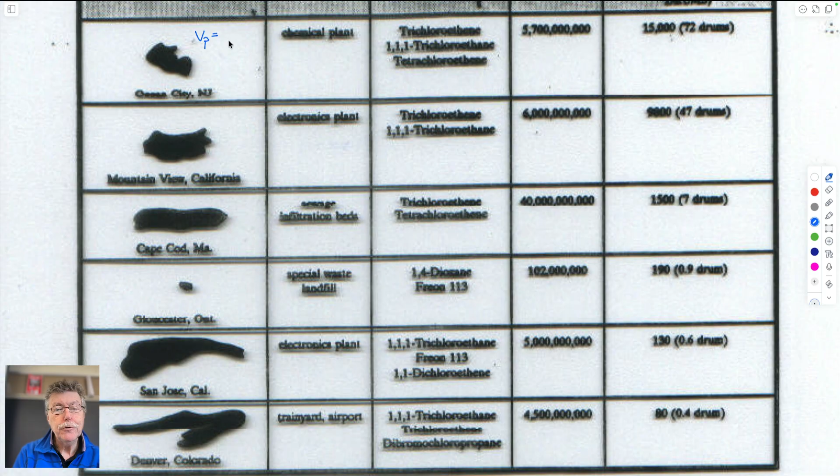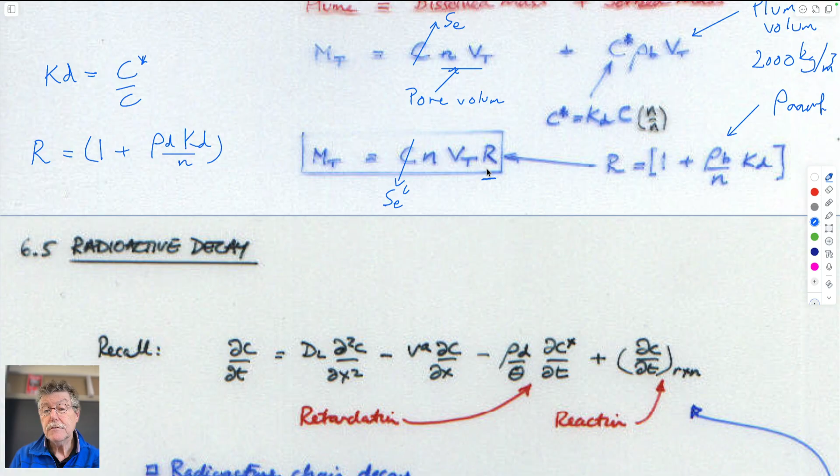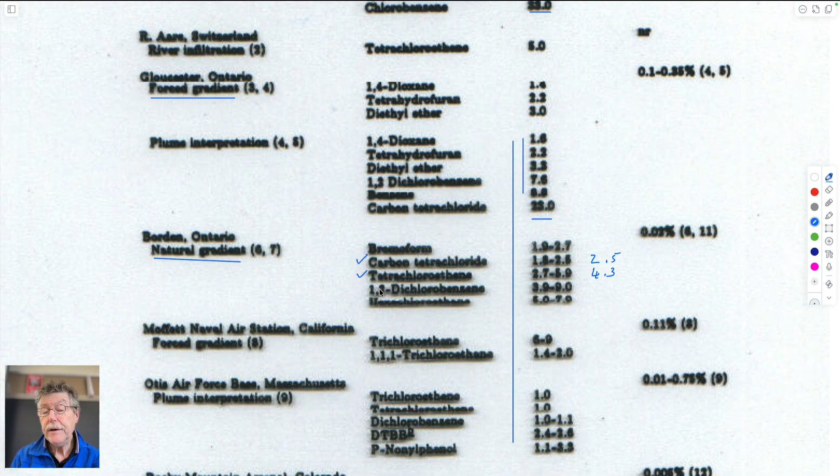And if you look at calculating from the shapes of the plumes, their areal plan view, the volume of the plume is equal to its area times its height. If we know the total volume of the plume, we know the solubilities of those compounds which are present, we know the porosity, and we know the retardation factor, which we had here for all these compounds, different for all these different locations, then we can calculate what the mass present in the aquifer is.

And it turns out that to get these very significant, big, contaminated aquifer portions, it's not very much stuff that goes into it. So these are 72 55-gallon drums, 7 55-gallon drums, 0.4 of a 55-gallon drums. The relative scales aren't here, but they're hundreds of meters, perhaps kilometers in size to get to these, and it takes very little to do that - 0.6 of a drum.

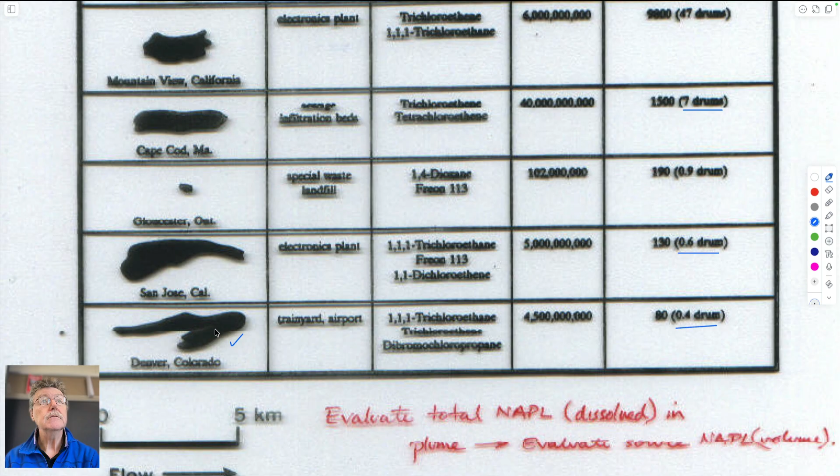And so that just makes the point that it's very easy to deal with when it's concentrated, not in solution - free phase concentrate in a drum - not so easy to deal with when you have a huge volume of water at very low concentration that you have to somehow do something with to get it out of the ground. That's the main point, so that's it. You just need to account for the part that's attached to the solid.

Next time we'll talk about the vadose zone. I guess we'll make the point that to get to being in the groundwater zone, usually stuff starts on the surface, goes across the vadose zone, and ends up in the groundwater zone. If it's a LNAPL, it will only sit on top of the groundwater zone because it's lighter than water. If it's a DNAPL, it will go through it. And we can try to estimate the rates at which it would end up being transmitted to the groundwater zone after transiting the vadose zone.

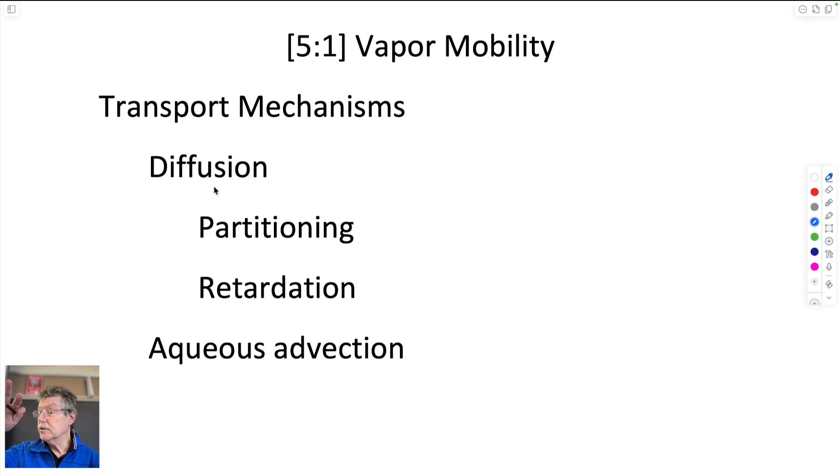And it turns out that the biggest mechanism by which it goes through is by being dissolved in rainwater, which ultimately hits the groundwater table. So I'm leaving it at that. Great, thanks very much.